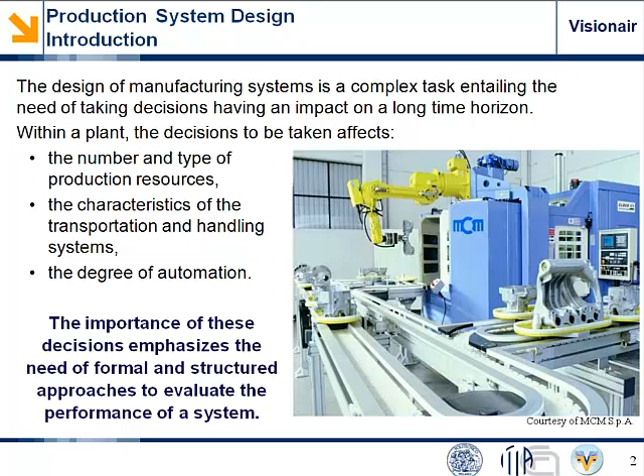In the design process of a production system, there are various persons, entities and actors working on different aspects of the same production system design, or different persons working on the same project. Every person, every entity, every actor works on his own aspect with various data representation standards and styles, and there are also various types of software applications and design tools used in this huge process of designing a production system.

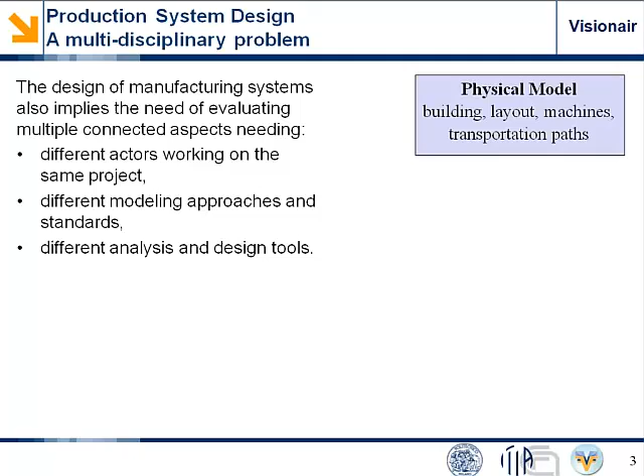Generally speaking, we can approach this big issue in various phases or stages. Physical modeling such as layout, machine, building, transportation paths - the physical one. Then we have a model of the production system in order to assess the various types of production processes, how things are managed together, the routing policies between paths, and handling problems conceived at a modeling level.

After these steps, there is a performance evaluation of the production system that has been designed, and eventually, in an iterative manner, various modifications can be carried out on the physical model, on the real situation, in order to assess the various elements that are not very optimal.

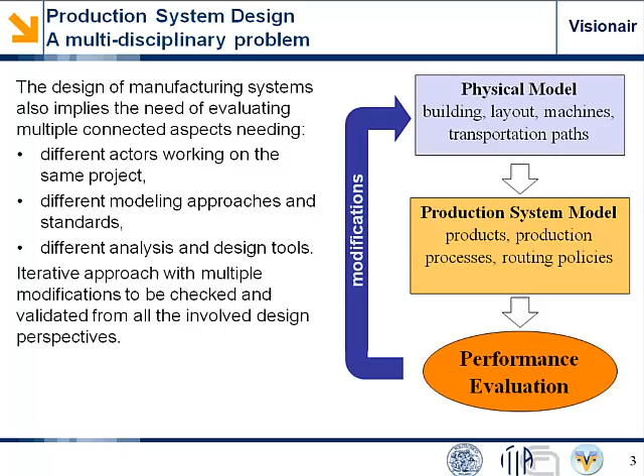So this is an iterative approach with multiple modifications to be checked and validated from all the involved design perspectives, the various modules validated and checked from various points of view. This is the idea of the collaborative engineering paradigm.

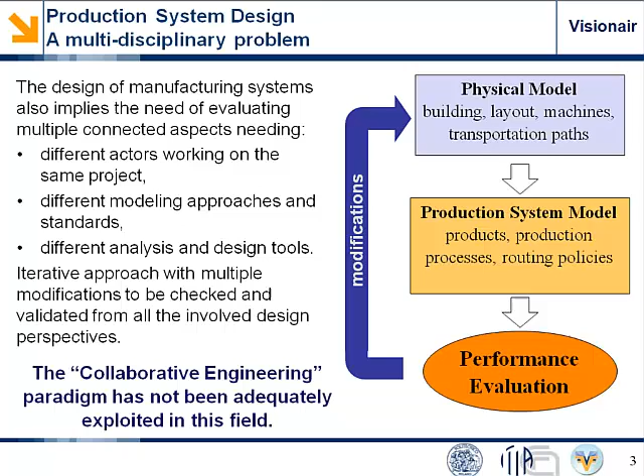In this field of production system design, the concept of collaborative engineering has not been very well inspected and exploited. So we have two aspects that will be discussed today after this short introduction: layout design, and in the lower right part of the screen, the performance evaluation of manufacturing systems.

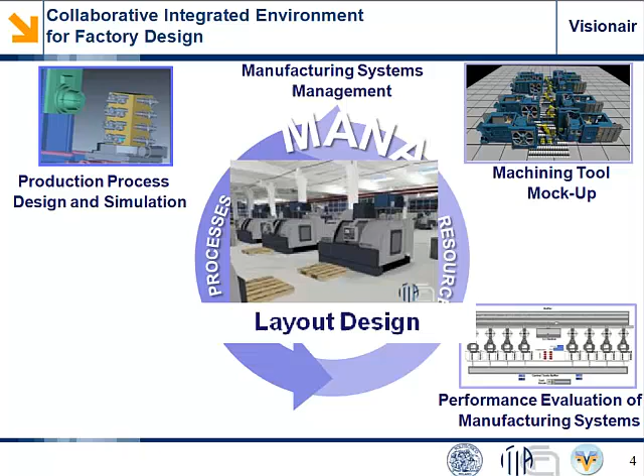Going to layout design, we have developed at CNR a tool for factory layout design - a tool to create digitally, in a virtual way, the layout planning of buildings, machines, and paths, how the spaces can be filled by various elements. This type of environment is called Giove Virtual Factory, a virtual reality collaborative environment.

It's collaborative because it can run on different platforms, on different computers simultaneously, and the computers can be connected together in a networked way, as occurs for example with Skype. The various actors, each playing on his own computer, can all play together in this virtual shared arena, which is the empty layout to be planned and co-designed.

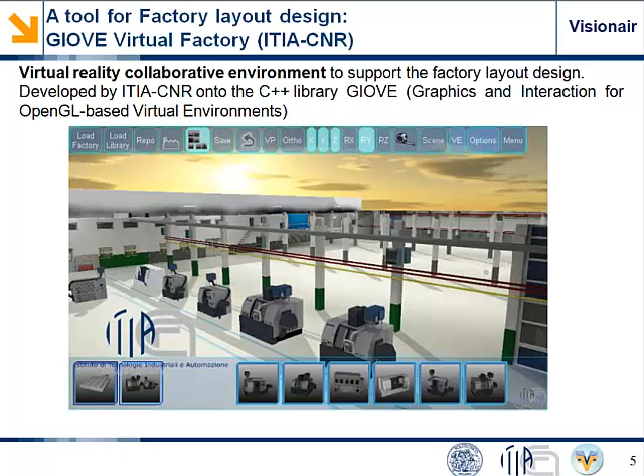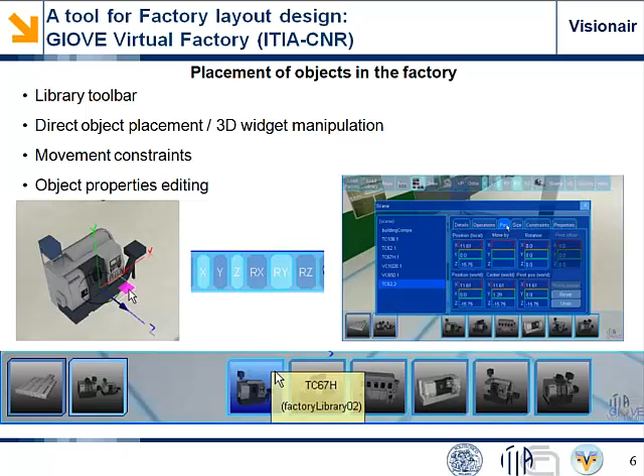This GIOVE Virtual Factory application has various features that allow users to do machine placement, rotation, translation, alignment, snapshots with automatic alignment, manipulation, and inspection of the various properties of machines and objects contained in the virtual layout being designed or redesigned.

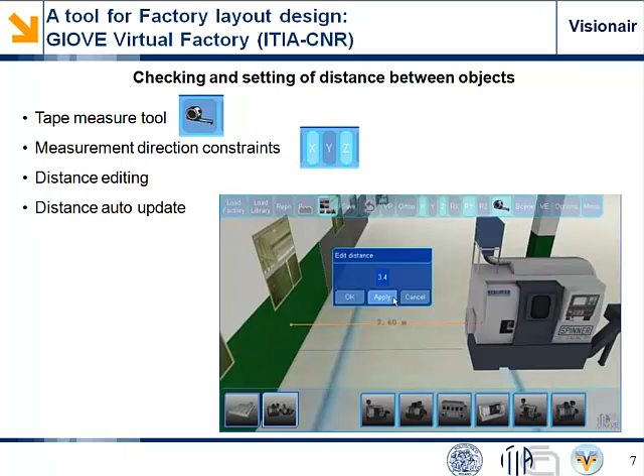There are measurement tools, constraints on directions, and various operations and operators that allow building a digital three-dimensional scene built from many virtual objects put together.

Another important aspect is that this GIOVE Virtual Factory application is able to visualize the process plans and the visualization of the simulation results.

But in this way, the GIOVE Virtual Factory is just a standalone application. The question is how to use this tool, GIOVE Virtual Factory, within the paradigm of collaborative factory design and collaborative engineering aimed at the design of production systems.

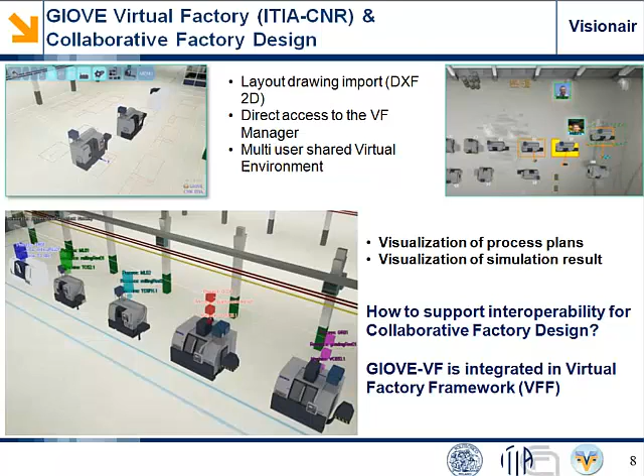So the Virtual Factory Framework project is a way to answer this question, where GIOVE Virtual Factory becomes a brick of the whole framework. It becomes a tool that can connect the various actors together in designing, in a common framework, the virtual layout that is one of the multiple stages in the design of a production system.

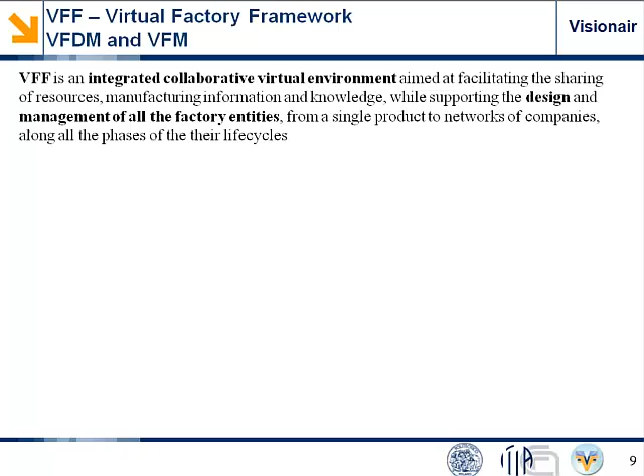Just a few words about Virtual Factory Framework. As you can see on the screen, Virtual Factory Framework is an integrated collaborative virtual environment aimed at making it easier to share various data, resources, ideas, concepts, and manufacturing information and knowledge when approaching the problem of designing and managing factory entities in the context of a design or production process.

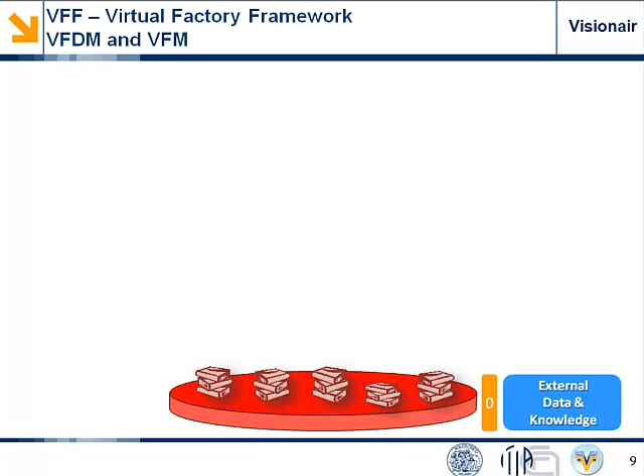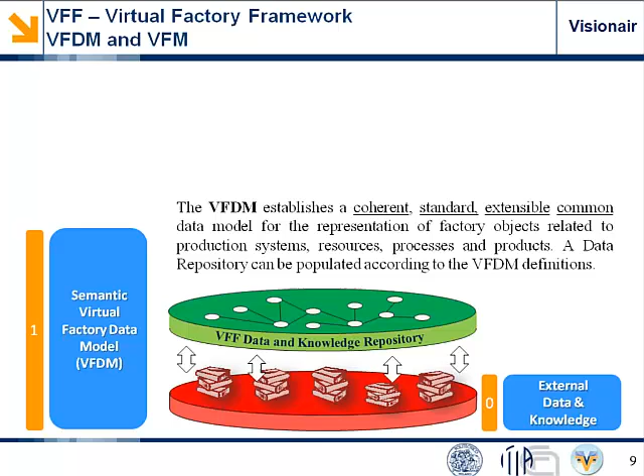So the conceptual steps building the Virtual Factory Framework paradigm start from a layer of data and knowledge collected by external actors and competencies working together in the design process of the production system. Then there is a virtual factory data model, which is a semantic representation of data using the ontology approach. With this semantic virtual factory data model, the various data and knowledge are correctly formalized and represented within a common data model representation through the ontology formalism.

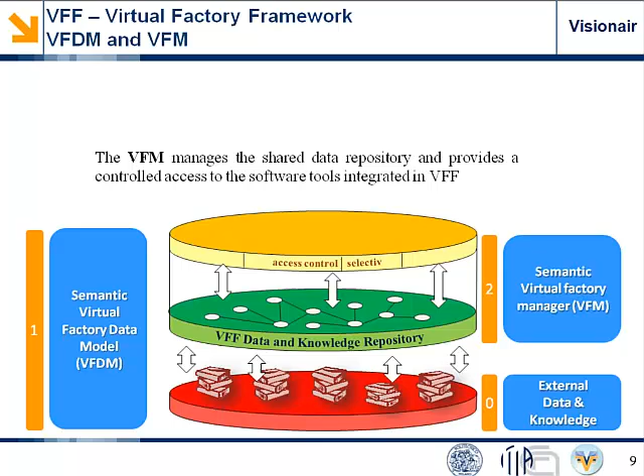And then this type of knowledge can be accessed by the various different tools used in various stages of designing the production layout, allowing them to work together by using all the same shared data model.

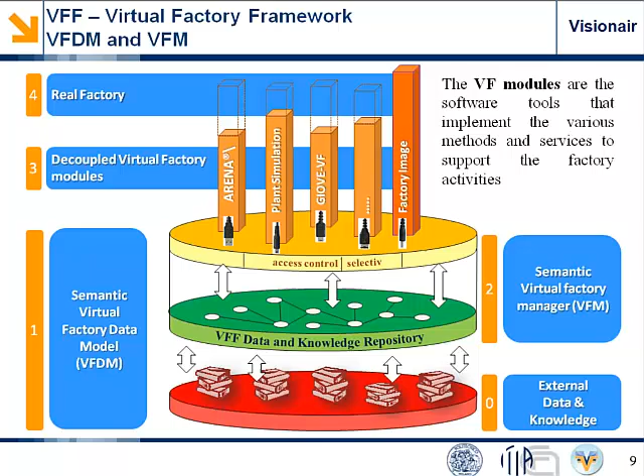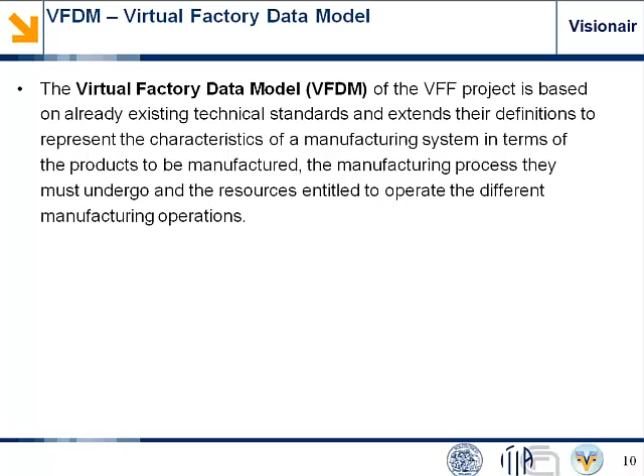The data model is based on various types of technical standards and tries to bring together all the various technical standards. Moreover, this data model is mainly based on real standards adopted in industry and translated into a set of ontologies using semantic web technology.

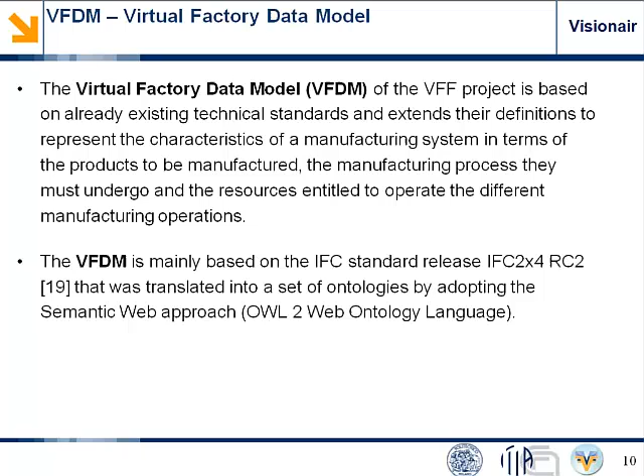So going back to GIOVE Virtual Factory, at this point it becomes a brick integrated into a larger framework, a brick that uses this type of common shared data model.

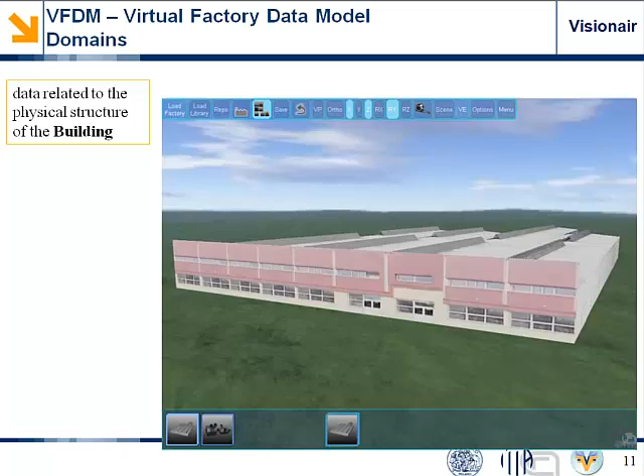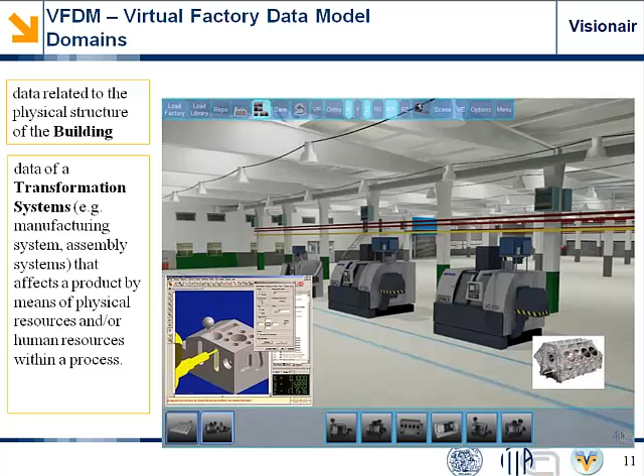The Virtual Factory data model can represent, also within the GIOVE application, various types of knowledge domains: data related to the physical structure of buildings, data related to production resources, data related to products and processes provided by a resource to transform a product, and also data of the transformation system.

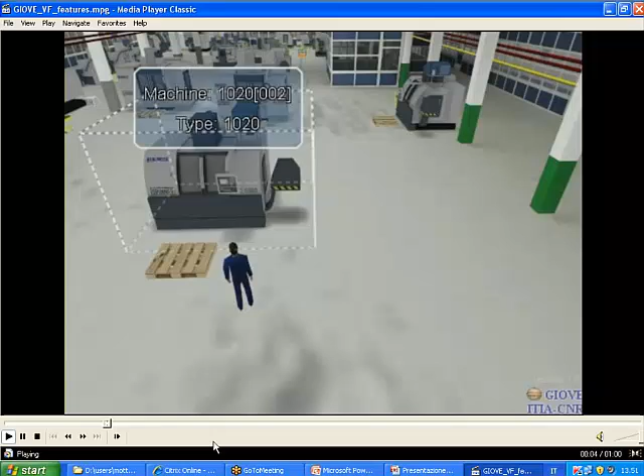Here in this video, the point of view in the virtual environment is subjective, and here we quickly demonstrate the ability to move, duplicate, and clone the various machines, and then after cloning and copying, to give each machine its own specific properties.

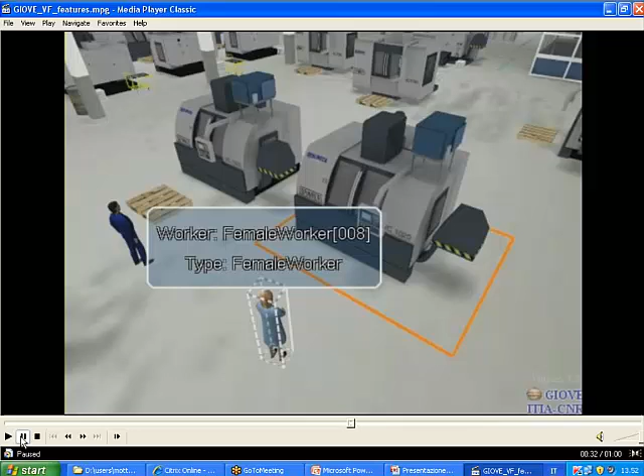Also, workers can be added and linked to the various production lines in order to represent the fact that on a specific machine or production line there is a certain number of people working for it. The representation of this type of link is done with lines connecting the person to the machine.

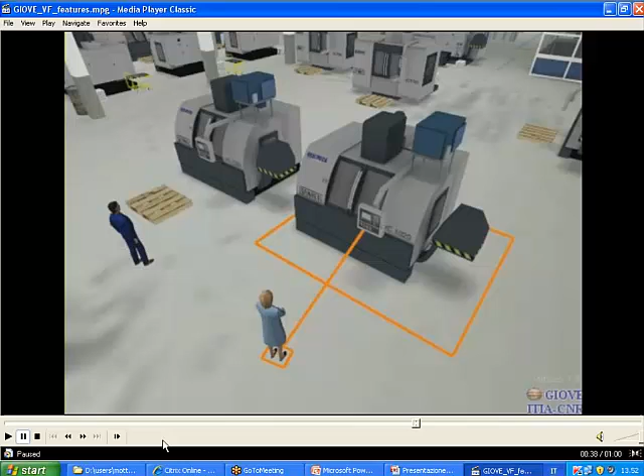Also, a special orange floor visualized around the machine is used to indicate the safe zone or other types of information.

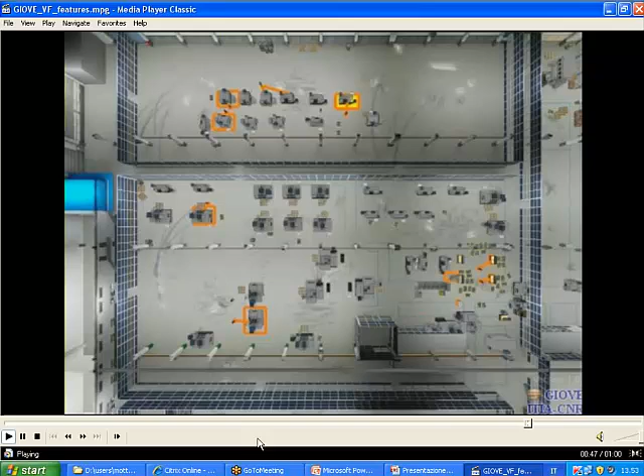And here we can also see that the interface of the GIOVE Virtual Factory allows the user to have a top-level view, as we're looking at a 2D layout, to better understand the layout of the entire building.

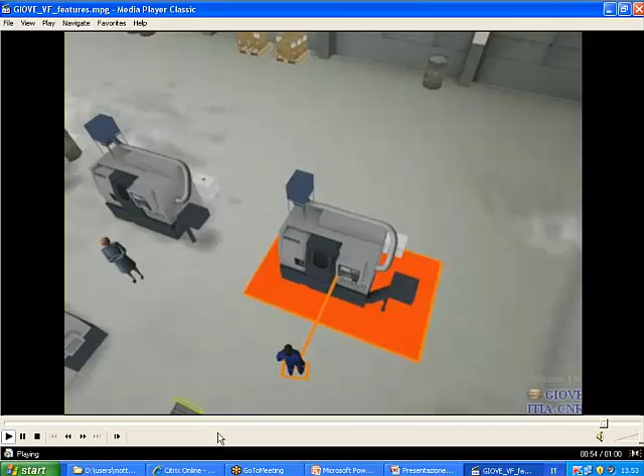Two visions: in the upper part of the screen you see the point of view of a specific user, and in the lower part of the screen you see the point of view of another user. Both these users are connected together in the GIOVE Virtual Factory, sharing the same virtual layout, and they can work together in a collaborative session in order to manage the layout editing.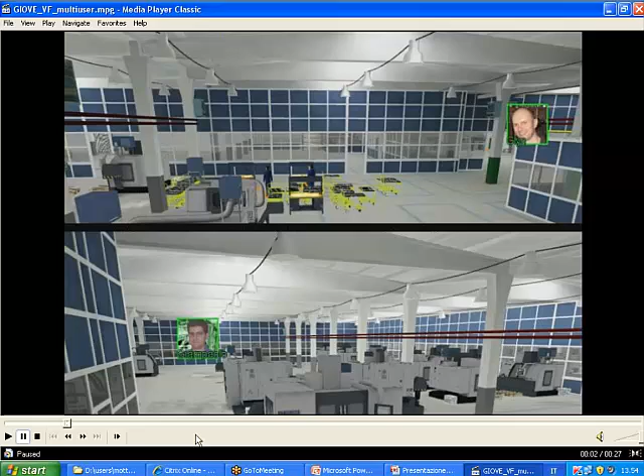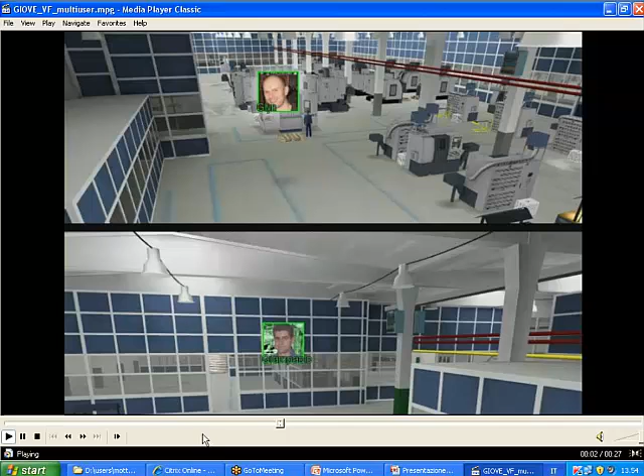Every user can see the other persons with a label showing the image, the photo of the person. For example, you can see that this transporter is moved here, and here there is the same transporter seen from another point of view.

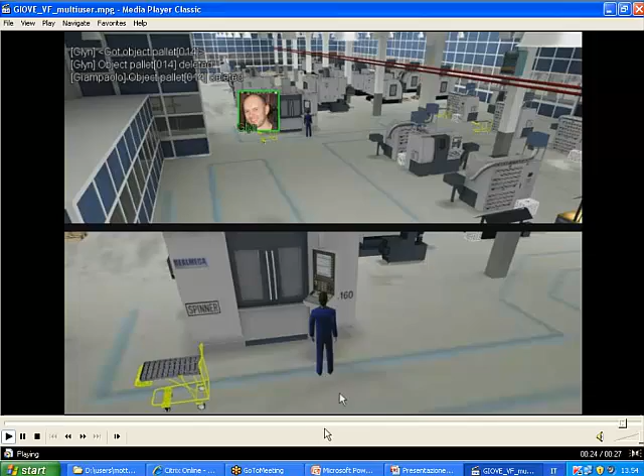Okay, this is just a quick video showing a real-time representation of the collaborative and multi-user environment.